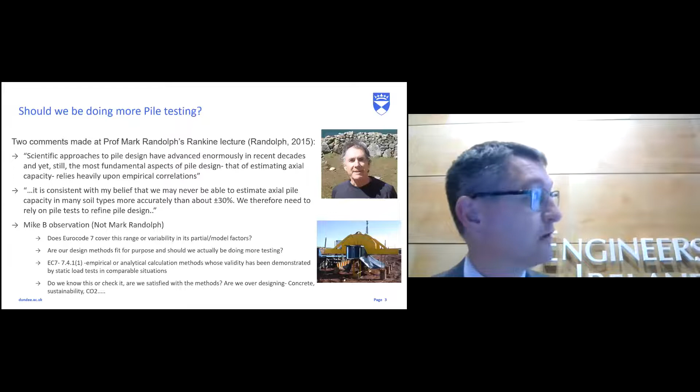So, pile testing - I picked out two comments from Mark Randolph's Rankine lecture on pile design, particularly offshore pile design, seen as a very important paper. It's quite interesting what he says about pile design being empirical and the use of testing. To paraphrase: scientific approaches to pile design have advanced enormously in recent decades, and yet the most fundamental aspect of pile design, estimating axial capacity, still relies heavily upon empirical correlations. He goes on to say it's consistent with his belief that we may never be able to estimate axial pile capacity in many soil types more accurately than plus or minus 30%. On that basis, we therefore need to rely more and more on pile testing and refine our design methods. So that's Mark, considered one of the gods of pile design, particularly offshore, telling us that we should be doing more pile testing.

And then my observations based on that - people are probably more familiar with using Eurocode than I am.

I'm an academic, I don't use these things. I hopefully put some bits in if we do good stuff.

Does Eurocode 7 cover this range of variability that Mark's talking about, plus or minus 30%? Are our design methods then fit for purpose? And should we actually be doing more to verify them? We always assume they've been verified, but do we actually know where our factors come from and what kind of tests or what kind of piles they were actually designed for? And it is there in EC7 already, that empirical or analytical calculations should be validated against static load tests in comparable situations. So are we confident that that's ever been done in their lifetime?

I think the other thing I have a problem with in this modern day, not using tests as we should, is that obviously with a view to things like sustainability, use of concrete, CO2 levels, if we're over designing, is that a result of our empirical methods? We should be refining things as much as possible to get away from that. So in my view, pile testing real piles and construction methodologies is important.

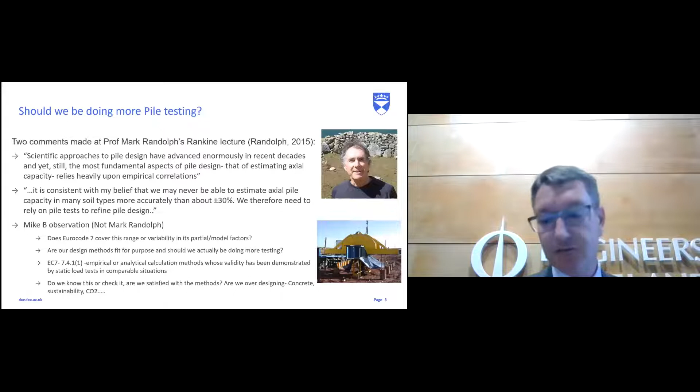What should be forcing us that way? Is there anything that we've got out there? So obviously this is UK experience. I'm not sure if you're familiar with the ICE's SPERW, but this is where we go in the UK for guidance on pile design, specification, testing, etc.

And they move more to a risk-based way of looking at pile design and pile testing. So if you've got low risk, for instance, you're well experienced on that site with that methodology in the same ground, then it's not essential that you're doing pile testing. But then if you're moving to higher risk situations where you've got complex ground conditions, you don't know how well your empirical methodology might perform there, then it starts to prescribe the amount of pile testing that you should be doing. So it is there in other forms of codification or local guidance, maybe similar in Ireland, but there is in the UK.

So there is a precedent for doing more pile testing based on risk levels for your site. Nothing in EC7, I think, at the moment, as far as I'm aware, to try and cover that.

Also, I think Trevor would have been at this, and I think we discussed things at the time of 2016 ETC3, Technical Committee European, on looking at EC7 and its effects to date in 2016 on how we design piles and how we construct them. And every country, apart from the UK, as I said there, they obviously didn't get the memo.

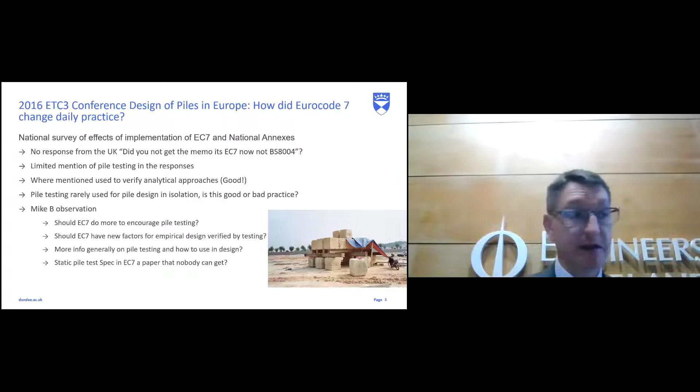So was there any pile testing going on? Are we using it as probably we should be? So as my observations again at the bottom there, should an evolution of EC7 been doing more to encourage pile testing? Should it have new factors or incentives or model factors if you do a pile test? Should it give you a better factor of safety effectively if you do the testing? And should there be more general guidance on pile testing?

I think I remember when looking at trying to get the spec for static pile testing, and it's an ISSMGE paper that nobody can get hold of, I think, from memory if you look in EC7, but maybe somebody's had more luck than me of getting that guidance.

So moving on to what I'm talking about that's slightly different, is my speciality, and what we generated testing standards for, or what we call rapid load pile testing. And this is different, obviously, from a static pile test, and it's very different from a dynamic pile test. And there's an example of the kind of outputs that you might see from this kind of testing. Here you can see time on the bottom.

Note, this is in milliseconds, and you've got a pulse of loading, and you've got the corresponding deflection as you go. So compared with a static load test that might take 3 days to complete, or a dynamic test that might be over in 10 milliseconds, you've got an event here that's about 100 to 200 milliseconds. So your pile's moving relatively fast, could be up to a meter per second in terms of deformation rates.

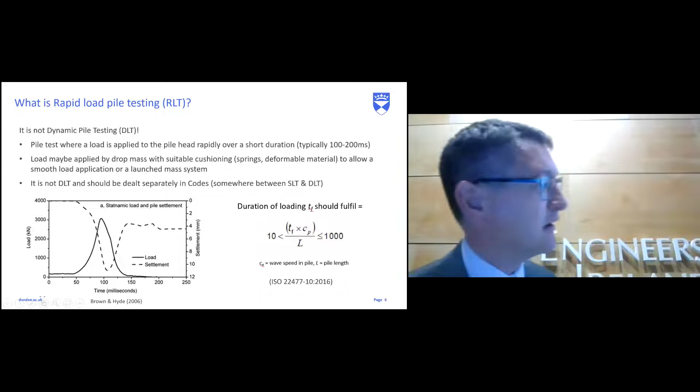It's undrained and viscous, moving very, very fast. One of the things I'd like to point out is that it's very different from dynamic testing, and obviously very different from static testing. There's an official definition in the code we developed for testing, which came out in 2016: ISO 22477 part 10, particularly for rapid load testing. So it's a very different test to a dynamic test.

Just to exemplify that, we've got my elephants to show you the differences. We've got a static test, an elephant sat on a pile. We've got rapid load testing in the middle, which is an elephant falling on a cushion - that gives you a longer test. And then we've got the dynamic testing over here. This was done by Allnamics, who produce a rapid load testing machine, and obviously they don't like dynamic testing because the pile's not very happy about being banged so hard so quickly. So slightly biased, but it shows you the slight differences in what we're doing.

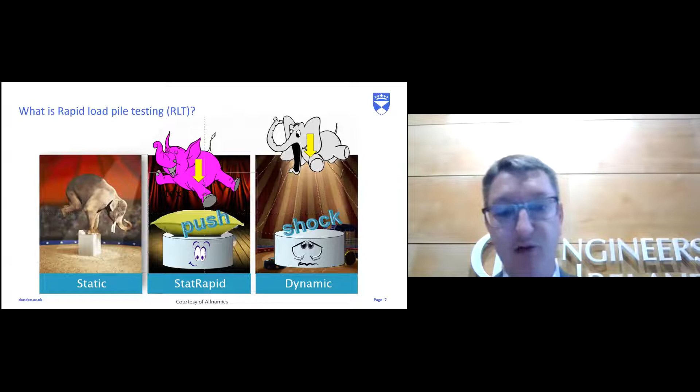So just to give you a feel for how it's built up, you see the machine on the left there - that's a 3 meganewton machine. You prepare the pile just by sticking or gluing a plate on the top, not a lot of work to be done there, so it's quite easy. You've then got a reaction mass that you saw being thrown up in the videos. It's about 5 to 10% of what you'd need in a static test, because you're accelerating that upwards at high speed, so you're getting the inertial benefit. The kit's a lot lighter than you would need for static testing.

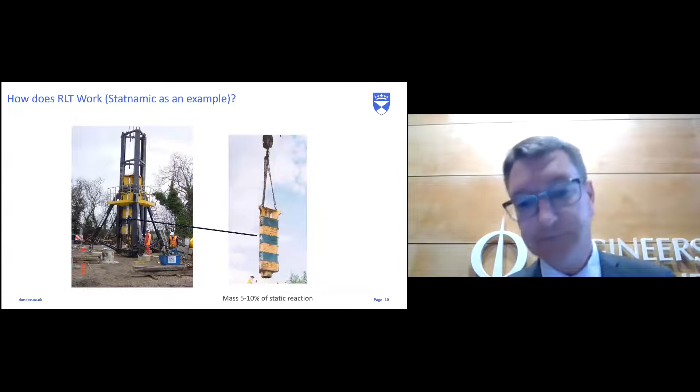Because it's quite an interesting event, we often use non-contact methodologies for measuring displacement. In this case, they are shining a laser on a detector that's on the bottom of the machine. More recently, they use high-speed optical methods - basically digital theodolites that track a target, as technology's moved on. We'll also put an accelerometer on the Statnamic machine at the bottom, which gives us backup of acceleration, velocity, and displacement as needed. So you can measure things in different ways.

The other thing to point out is that this sensor you'll see here is also a load cell. So you don't have strain gauges on the pile, you've got direct measurements of loads going on. Effectively, it's not like a dynamic test where you're having to interpret strain gauges on concrete, which may also be another source of error. So everything's measured directly.

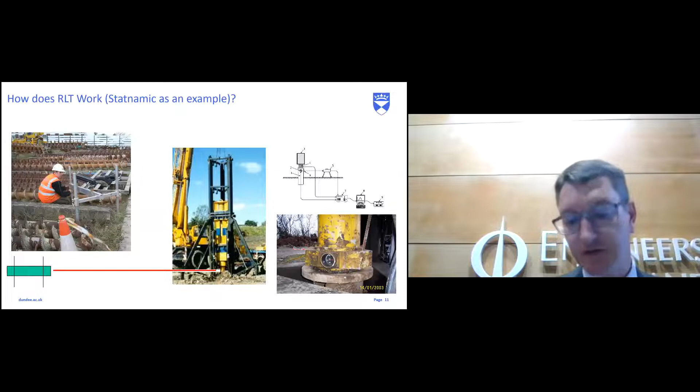And the Big Bang - how was that created? In the Statnamic machine, they burn a commercial fuel, as they called it - we're not allowed to call it explosives because people got jumpy when you went across borders with explosives. They're effectively mining explosives; they burn, you can burn them in your hand and they burn very slowly, but when they're constrained in the chamber that you saw there, they burn fast and create a lot of gas. It's basically a gas release that's forcing that mass upwards. So that's what they look like.

Some animation has popped in here - they pop that in this mesh cage. There's a shotgun cartridge cap in the bottom. They put 12 volts across that, and that starts the process, and they start their logging. You can see the guy on the far side loading it into the Statnamic machine, and there's a load cell at the bottom of that, which we saw previously.

There's a piston, and the weight drops down on top of that. When the gas is burnt, it vents out the top, and that's what forces the weight upwards, and you get an equal and opposite load on your pile head.

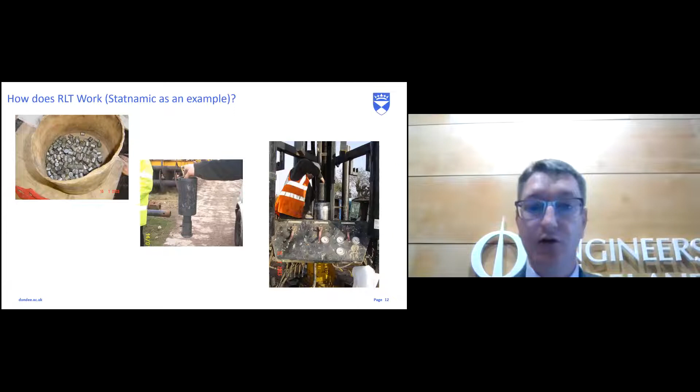Something's gone weird with the animation. In terms of different devices, effectively what you're doing is only creating a long duration load - that's all you're trying to achieve. So there are different ways to do this, and Statnamic has gone a bit by the wayside, I think because of the fuel problem - it's expensive, and getting it across borders and shipping it was a problem. So a lot of people have moved to more cushioning type systems.

So there's a couple of examples here from Japan. We've got basically a drop mass, as you can see, and they drop it onto a series of springs that have been tuned to control the duration of the loading event. You can see the differences in sizes here - something man portable at 200 kilonewtons, up to 2.5 meganewtons using a standard crane and some kind of rig to drop that onto a cushioning unit. So you can get quite a variation of different system types and approaches.

Pseudo-static pile load tester, again, that's a drop mass onto springs. Here the springs are above and below the weight on the left-hand side.

And then the dynamic guys tried to get in the action a bit. This is just a drop weight, and they dropped it onto what I call the egg box. The egg box is just a deformable piece of steel coated in rubber, so when the mass drops on it, it traps air in the little egg box pockets, and that again acts as a cushion and deforms to try and create a longer load duration.

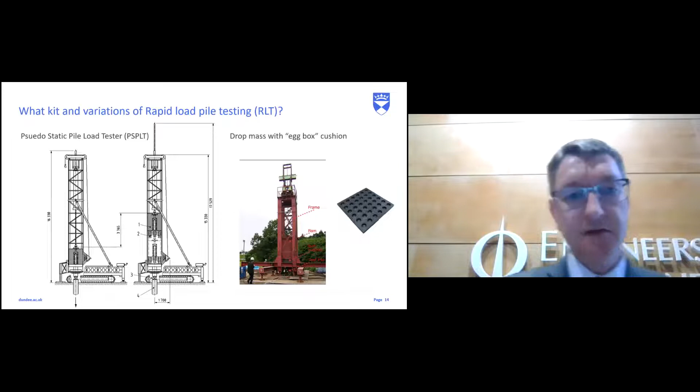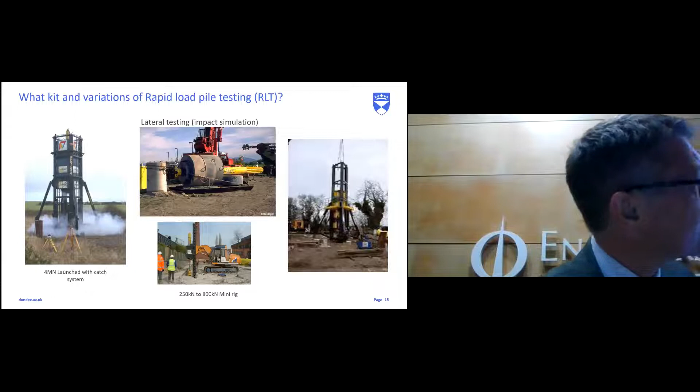Statnamic, we've just seen - this was the most common thing when I was doing my PhD, different rigs, 4 meganewton, used for lateral impact load simulations. They've used it before, so it isn't just sat on its side - it's about to load that pile as if it was a ship type impact. You can see a range of different rigs there, right down to something that can go on a mini crawler and give you about 250 kilonewtons. I think the biggest Statnamic test ever done is 103 meganewtons. So there's quite a scope of sizes, different types of tests you can do, and benefits to doing that.

That's the same pile, just cycling, just reloading each time. You can quickly - not static testing, but you can do different cycles at different pulse levels. We might see that in some of the data in a bit.

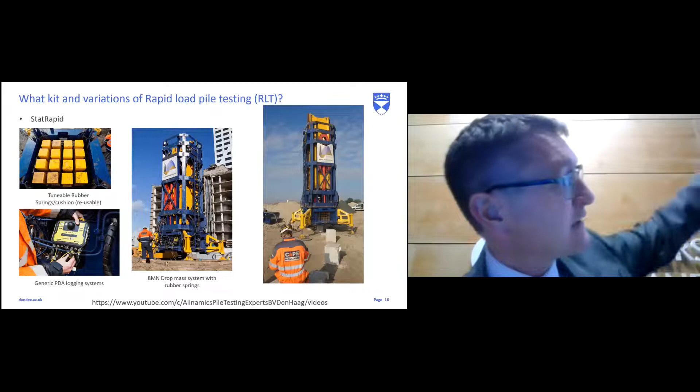That was a bit more impressive, wasn't it? I think the most modern evolution of this is the rigs that Allnamics are using, based out of the Netherlands. Again, this just works on a drop mass system - we'll be able to see the video - and they use a series of recyclable rubber springs. These are just rectangular, long cuboid type springs. They load them in, and they've got different colored ones that give different durations of events. Again, they can control the height of the drop to control the magnitude of the event. These guys supply all sorts of offshore monitoring as well, using standard PDA type systems that they supply themselves.

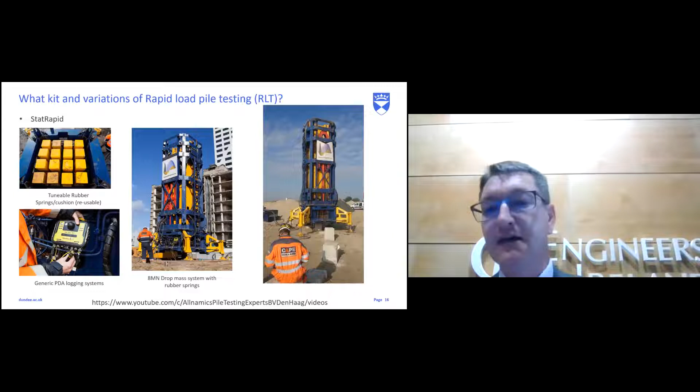So it's far less interesting because there's no fuel involved. They just use hydraulics to pump it up to the height they need, then drop it, and it catches as it goes, so it doesn't reload the pile. That's one of the problems with some of the early systems people came up with - you get a weight bouncing on the pile, and then it's difficult to sort out what your load signal is, what your final displacement is, this kind of thing.

I think it's also quite nice that it shows off what you can do on a congested site on working piles. There are 3 or 4 piles next to each other, with very small compact rigs that you can get onto small sites and test as you go.

So I think that's why I've used this example, the photo here of this congested site with lots of small piles where they're testing working piles, getting access to that, which is not something you might normally think about doing with a standard Kentledge or reaction pile static load testing regime. So there's much more scope for testing working piles with some of these systems.

So that's my long list of benefits, obviously biased because I did my PhD on it, so quite happy to be pulled up later on it.

Congested sites, we said, it's obviously fast, quick setup. How long are you talking for a normal static pile? With reaction piles, maybe 6-7 days if you've got to get your piles in before you're doing anything. And then you could be up to 3 days, depending whether you're doing MLT or CRP type testing. Multiple cycles on a pile, as I've said.

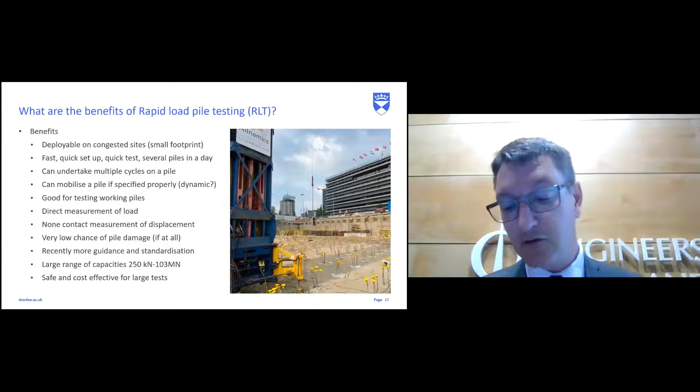So going a bit more towards drawbacks, being brutally honest, quite happy about that. That was what my PhD was on. When I started, a lot less experience and guidance, and that's something I've been trying to do a little bit about myself as an academic.

Availability of equipment. Currently, I think you've got to go to mainland Europe, Holland, to get the nearest machines. So you're going to have to mobilize something that's going to cost you money. So you're going to have a relatively big job to probably get it onto Ireland, I think, to make it cost effective.

Both dynamic and rapid load testing don't give you characteristic resistance directly. There's always going to be some analysis, not currently mentioned in EC7. Hopefully with the evolution they are, and the testing standards that we've created that are supposed to integrate with that. There are no model or partial factors in EC7. So how do you do design on that at the moment?

And my area of interest is in clays, you're going to get big rate effects. So you're not pushing something at 0.01 mil per second, you're pushing something at a meter per second. And how do you deal with that in terms of rate effects?

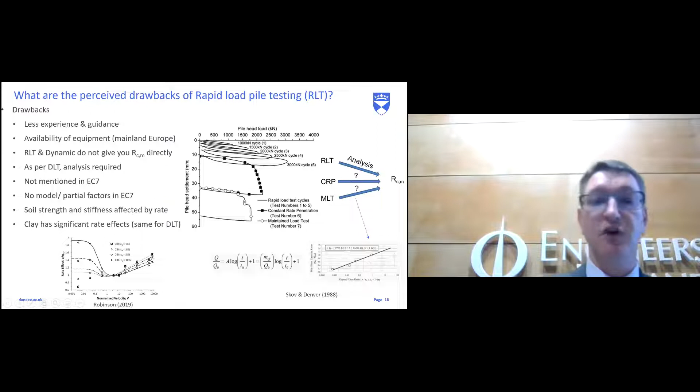So what is the right speed to test at? Probably there shouldn't be a standard speed. It should probably be soil dependent, but you can get much greater gains in pile capacity by going very slow. We work down here undrained, but all my work is out here in the viscous regime, where the soil is moving very, very fast. So thinking about rate effects is an interesting thing anyway - partial drainage, undrained, viscous - something useful to be aware of, I think.

Being engineers and specifying things, we need precedent. We need to be confident in our methodologies, and rapid load testing is relatively new. Before I started, there were two international conference proceedings on it, symposiums in Europe, and the regular stress wave conference - I think the next one's in Rotterdam soon.

It's mentioned there quite a lot. There are European case study usages - I'm responsible for one in Grimsby, which is the same soil as Cowden Till. If you've heard about the Pisa testing, that's where they were testing the Pisa piles for monopiles. It's been used for a long time by BRE, and Oxford ended up there doing their Pisa monopile testing, so quite a bit of work there previously done by BRE, and then reported by myself and John Powell of cone fame.

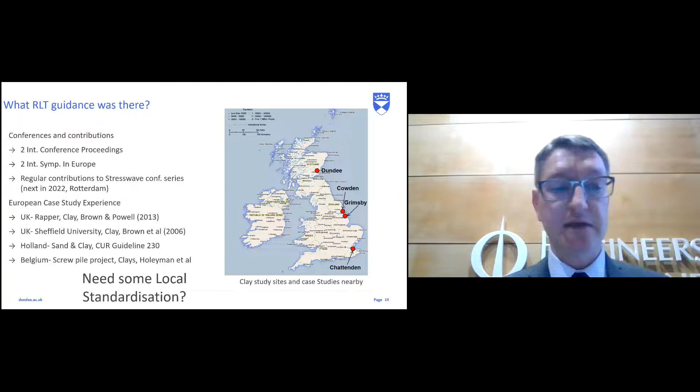In Holland it's been used a lot, so there's a lot of documented studies, similar in the US. The CUR document there is like a BRE standard in Holland, and they've built up similar databases for Holland, Germany, and the US. So there's a lot more experience in Europe of these testing methodologies - those are just some of the relevant documents.

And then, sort of where I came in, I got roped into being on a working group for TC341, where we got given the job of creating testing standards for dynamic load testing and rapid load testing. One of the problems we had, and if we're criticized for it, is that we had to develop those while there was no static standard. The static standard actually came out after the rapid standards, because it started around 2000, before my PhD, and they still couldn't agree in Europe and come up with a standard. I think that project got cancelled about three times before they finally came up with one.

Trevor will be able to tell us whether it's in EC7 with its evolution, because it's not currently mentioned, as I said, in the one we've got at the moment. And there are no model factors, which is a problem for rapid load testing.

Why was I brought in? I think I've got a track record, even as an academic, of making things happen. There are several big publications with my name behind them, and I got brought in as the Yorkshire Terrier to try and bring it out. I'm from Yorkshire, if you didn't know, and unfortunately our national dog is not as interesting as the Irish Wolfhound - I've got the Yorkshire Terrier, unfortunately. So when things seem to go wrong, I get brought in to make them work. There were a lot of arguments, and the working group had stalled.

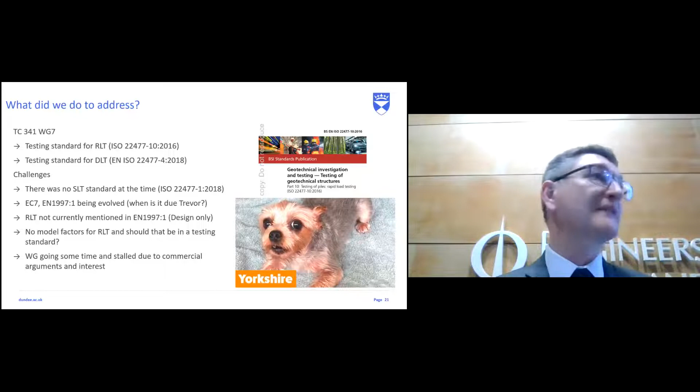What I'll mention later is, as an academic, you see there's a lot of commercial interest. So maybe not in a Eurocode, but in a testing standard, everybody has a competing technology. I was just battling all the time for things to go forward, but it was for commercial reasons, not technical reasons, that I was being held up.

So what's in the standards and what's not in the standards, and what needs to be in the testing standards. I'm talking particularly about the testing standards for the two types of pile testing we're looking at.

When we looked back in the literature, David Muir-Wood showed that the surface area of the particles in clays affects their behavior quite significantly. He found a link with slope of the critical state line and plasticity index. There's something more fundamental going on.

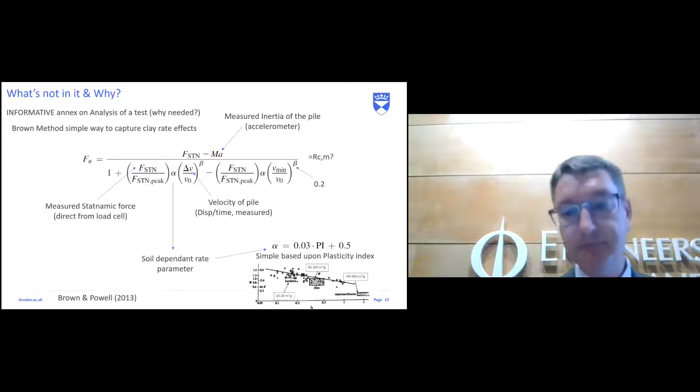That actually comes out as something that Randolph and Simons created for dynamic pile testing, so it's got history as well. But me being simple, I just linked it with plasticity index. There's no point for me having loads of equations that nobody can find the parameters for, and you can't measure from a simple lab test. So all of my work correlates back to plasticity index, even though we used some very specialized machines to measure the rate effects as we went.

So that's always my aim, to make it nice and simple, or nobody will ever use it.

This was all going into an informative annex, was my aim. I never really got there, so it isn't in the informative annex.

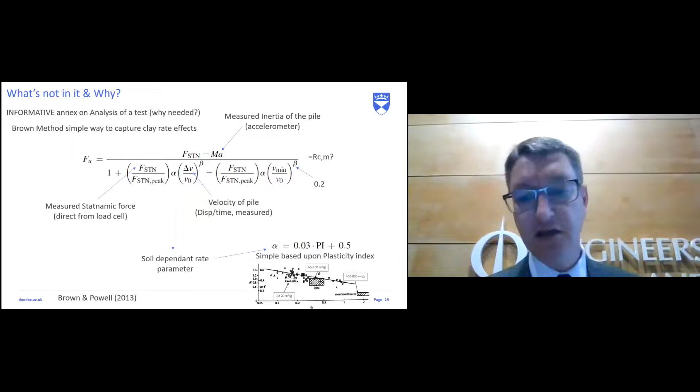So in our standard we've got a testing methodology, and at the end of it, because we needed some way of coming up with these rate effects, we thought we needed to have some design methods in it.

So we've got an informative annex, and we need an analysis methodology in there. My method's not in there. I get accused, or have been accused, of being an academic who likes to shout about what he wants to do—just blow your trumpet and get it in the standards. I was in charge of the standard, and my method's not in there. It is mentioned as something you might be able to use, but I'm also overly critical of everything I want to do and be perfect. It was only for one soil type.

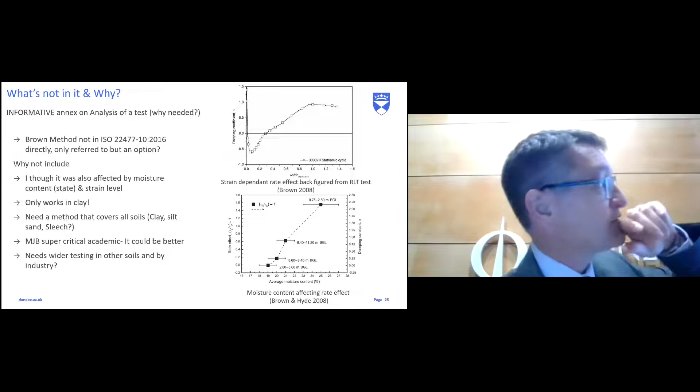I thought there was a lot more going on. I think at the time it was a function of state and strain level. So we back-analyzed rapid load tests, shown top right, for moisture content. You're seeing an increase in rate effect with moisture content, and very different strain level behavior during the test. Also, we've got lots of different materials we're going to be testing.

So I wanted a method that would work in sand, clay, silt, whatever else. All my original work was in clay, so it's mentioned but not fully addressed. I thought there was more work to do - typical academic - and there was more work to do, and we did it.

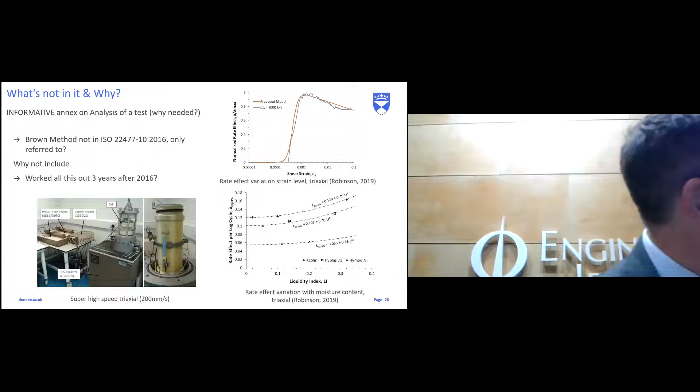So we built a very high speed triaxial rig. This can go about 200 millimeters per second. My original guesstimate of what was going on was actually correct - we've got very different strain dependent behavior with rate effects. They only kick in at a certain point, they maximize, and then they die away a bit.

They're also very much moisture content or state dependent, so you see very different rate effects for different soils. None of this '10% per log cycle' you get told - it's a load of rubbish. It also varies with moisture content, and isn't affected too much by over-consolidation ratio or stress history. It seems to be affected more by state.

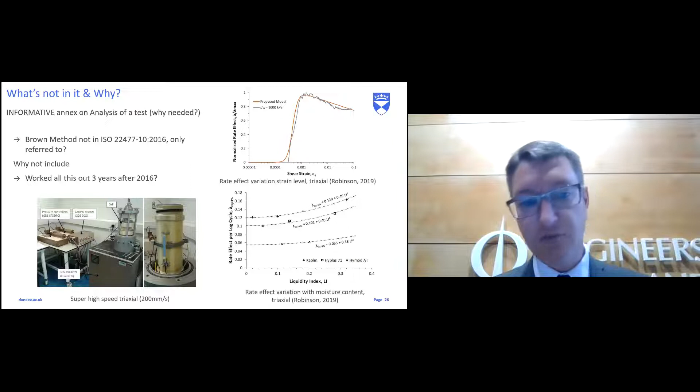Some of my early reasons for not putting it in were actually true, and we didn't work this out till after 2016 - so in some ways I'm happy mine didn't go in. What we did end up with was an informative annex telling you what to do, based on a methodology from industry, a large database of different tests, and distilled down to a very simplistic methodology anybody could use, because I like simple methods.

All this does is take off the inertia, using something called the unloading point method. Basically it looks at the point where you've got zero velocity in the test, and assumes that's similar to your static resistance minus inertia, because it's not moving.

It worked all right, but it needed correction. So based on a database of a lot of tests, we came up with a corrected method. This is one of the tables in here for picking the correction for different soils.

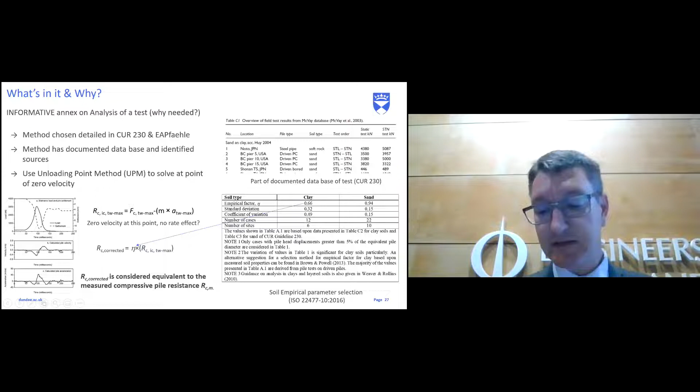We also thought it important that anybody - and his Yorkshire Terrier or his dog - could work out how to use the methods. So once you've got the data, the back of the document tells you step by step how to use it, and even how to create all the graphs.

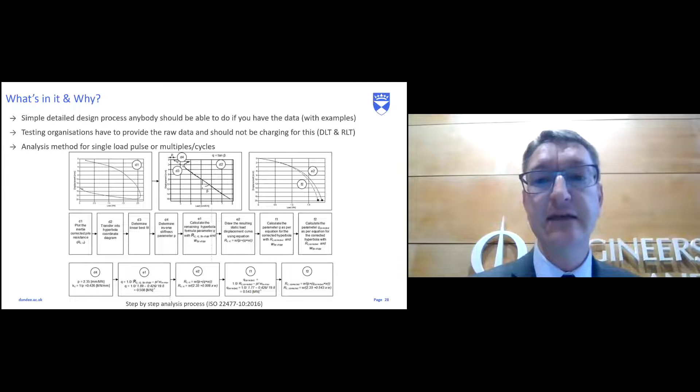So anybody could get the raw data from their pile testing person. If the dynamic load testing people tell you you've got to pay for it, just wave our testing standard in front of them - we got rid of that clause, so they have to provide their data for free. Some dynamic testing people try to charge for the real raw data - no, you have a right to it, so don't let them charge you.

But once you've got it, you can feed it into this testing standard, and anybody should be able to get the same answer. It's not so specialized anymore.

So just coming to finish, hopefully close, last few slides - how then do I feel EC7 should evolve based on what we've been doing in pile testing, and more generally, everything that's come out of this presentation.

There's the issue of a lack of testing going on. Can't speak for how the Irish do things, but throughout Europe I think there should be more testing happening, particularly when we're trying to be more efficient in our designs, reduce CO2 and concrete use, and particularly trying to get away from conservatism.

So I think when codes evolve, they need awareness of our testing standards. We've put a lot of work into making three standards to do with piles. Hopefully they feed through and don't get ignored, because they were designed to feed into that document. So you've got a design standard, an evolved Eurocode 7, and then you've got these testing standards where you go to find out about particular different tests.

Personally, I don't treat them as the same thing. There are commercial reasons behind that I won't go into, but they are very, very different tests, as you'll be aware from our elephants and also for people that have witnessed pile testing, and their analysis is very different. Rapid load testing is not dynamic load testing. It's a very different thing. It's not stress wave based, which is where all of that comes from.

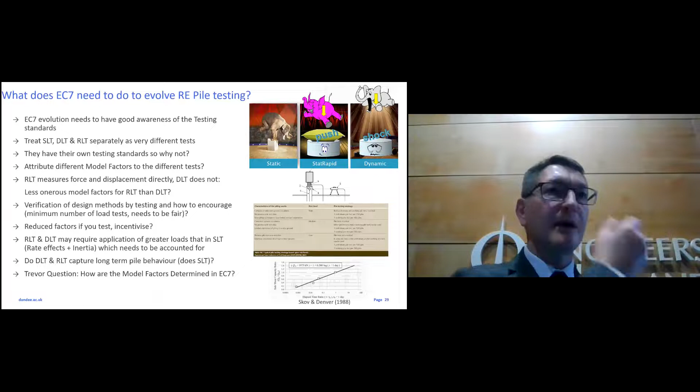So should you be giving less onerous factors for different methodologies? I think we should be doing more pile testing, as I said, and hopefully in an evolved EC7 it's encouraging that. It depends on risk. Do you know the site? Have you used the piling methodology before? I think pile testing is obvious to me: you do a design on a bit of paper and you come up with a pile resistance methodology, but there's often nothing in there on how we got there or what kind of method we used.

It's often based on some wished-in-place methodology. How does it correlate to real pile testing and real construction? And how then do you pick up when things go wrong? If you don't test piles, how do you know something hasn't gone wrong in the construction process? So I think there needs to be much more on what I call installation effects in our design methodologies as well, not just wished-in-place type design that we seem to default to quite a lot.

So that's back to reduced factors, particularly if incentivizing testing. One thing I would be wary of: if you specify rapid load tests and dynamic load tests, because of these rate effects and mobilizing the piles, you need to put a lot more load on, particularly for rapid load testing. You could see there we were putting nearly 1.5 times the load just to mobilize things. The rate effect is there, it isn't going away. If you come along and specify these tests as if you're going to apply a static load test, it isn't going to do anything. It is a different beast and you need to think about what you're doing.

But I think that relates to getting contractors involved at an early stage. They know more about these methods than I do because they do it day in, day out. Why not get them involved and get the proper advice?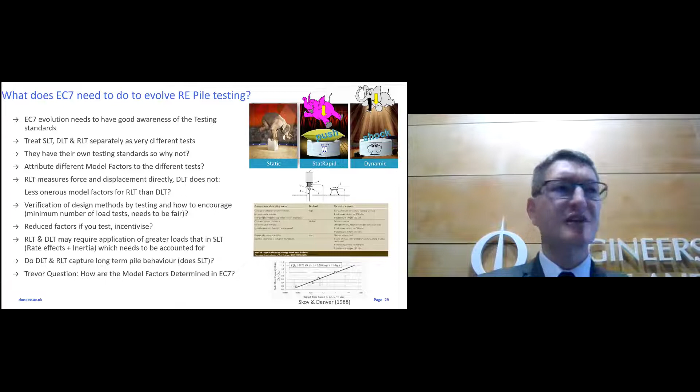Everybody can argue DLT and rapid load testing capture long-term behavior. I would argue, do static load tests capture long-term behavior as well? We see a lot of these things that came out of Imperial about evolved pile capacity over long periods of time. So there's always an argument about whether it's a static pile test, and I always ask, well, what is a static pile test and what is long-term pile behavior? So maybe don't get your knickers in a twist about it, and just accept any test is a good test. It's all helpful as far as I'm concerned.

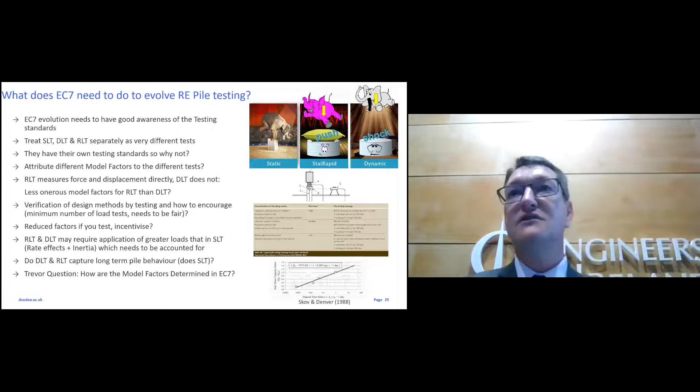So I'm not involved with any of these organizations or methodologies anymore. More testing is better, horses for courses. If you've got a dynamic machine on site or a drop hammer on site, you're going to use DLT. It's obvious, you don't have to mobilize something, it's there, use it.

Any testing is good testing as far as I'm concerned. And then leveling one at Trevor, you might not want to answer: how are our model factors determined in EC7? It reminded me, as an undergrad, I'm sure it was a Guinness beer mat, but it might have been a John Smith's, so sorry if I'm saying the wrong beer, but I was looking for beer mats and couldn't find it. It said 87.6% of all statistics are made up on the spot. So do our model factors come from statistics?

And if they do, are they made up? I think they're confidence, but we can push Trevor on it when he's had a few beers.

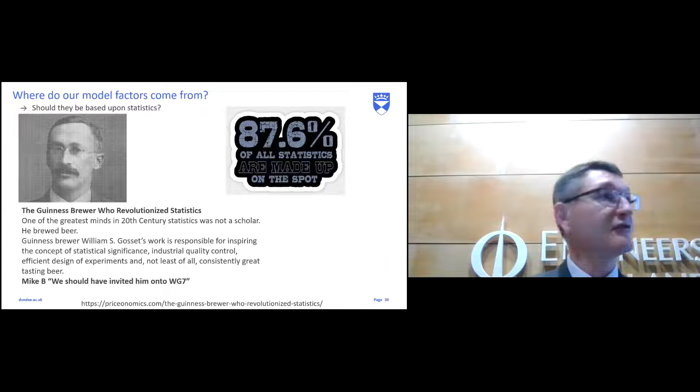I just found out of interest, you might have come across William S. Gosset, supposedly one of the fathers of modern day statistics, who came out of the Guinness Brewery. He was trying to refine the actual process using statistics, so I think it's quite funny. He's a bit like a code type working group member. It says he developed the concept of statistical significance, industrial quality control, which is what we're sort of doing, efficient design of experiments, and not least of all, consistently great tasting beer. I wish he'd been on my working group just for that last reason.

Thank you very much, Mike.

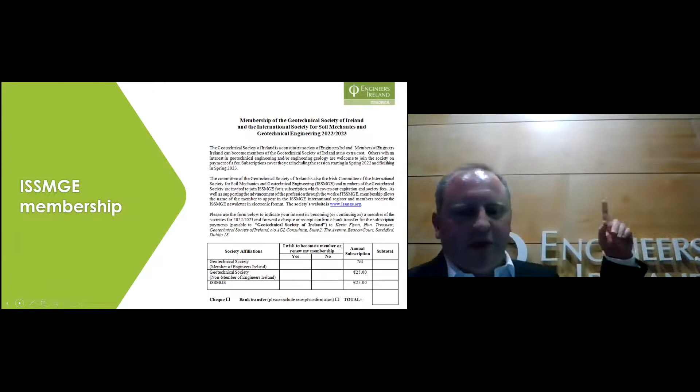Basically, there are two ways of joining the society: one is just go to the Engineers Ireland webpage and say you're interested, or you can fill out this form. Now, this form is useful because we do have members who aren't engineers, particularly geologists, who are encouraged to join us. So we do have membership outside Engineers Ireland, and this form is a useful way for them to join.

And if you were interested in joining the ISSMGE as well, you can get this form. Kevin Flynn is the person to contact. I had his email up shortly: kevin.flynn@agl.ie.

What do we do as part of ISSMGE? Well, one of the things we do is sponsor young geotechnical engineers to attend one of two conferences, either the European Young Geotechnical Engineers Conference or the International Young Geotechnical Engineers Conference. I think Trevor's probably going to discuss this a bit more later.

He's nodding, I think I'm right. He held a European conference here back in the mid to late 80s, and the money that raised has ever since provided the sponsorship for sending young engineers to one of these two conferences. Now, young is defined as under 35, which for a long time I felt was very generous, but no more.

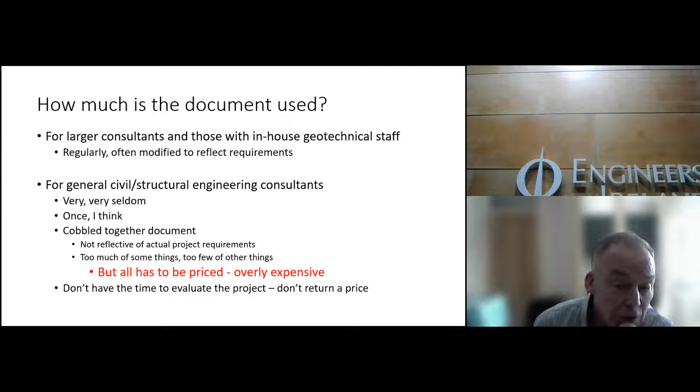And it makes the job expensive. Some consultants have said they don't have time to go through it to change the specification to reflect what they think the job should require. So, as Carl said, one possible solution is for us to do a slimmed-down document.

Talking with the contractors, they reckon our document is too big and actually scary. It's 175 pages, and a lot of civil engineers don't have the time or the training to understand everything in it. What they're looking for is a slimmed-down document, maybe 10 to 20 pages long, that they can go through and actually use. So this is something we're considering, along with updating our specification.

We were talking about what we might do, what way a simple document should be, and what it might be used for. One of the things we thought was maybe we could use the GC1, GC2, GC3 categories. And again, just like Mike, if Trevor needs to slap my wrist, he can do that later, but it'll be virtual because I won't be there. So maybe GC1 is something that civil engineers can price, because that's the majority of the jobs done in Ireland, and that might be what our slimmed-down document reflects.

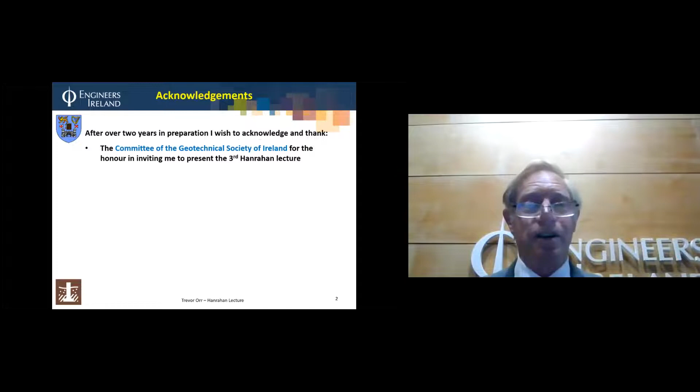As you're aware, this lecture should have taken place two years ago. I wish to acknowledge and thank the committee of the Geotechnical Society for the honour of inviting me to present this 3rd Hanrahan Lecture: Ciaran Reilly, the previous chair, who issued the original invitation, and Carl Brangan, who organised so many reschedulings - this is the 5th date we've had for today's event. Also Ken Murphy, here present from NSAI, and Eric Farrell and Ciaran Reilly for comments on drafts of this presentation and providing me with information and photographs which I've used.

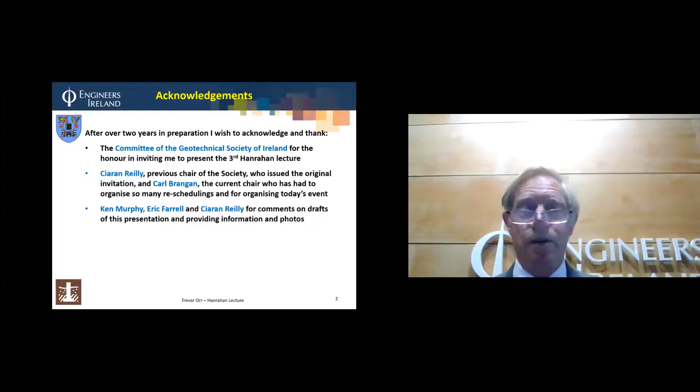Many geotechnical friends and colleagues in Ireland and Europe have shared their knowledge of geotechnics and their friendship. And I better not forget my wife Diane and family for their support and patience, putting up with me working on my presentation, often late into the evening or night, and not being available to look after grandchildren when I think Diane thinks I should have been.

The topic I've chosen is how geotechnical design in Ireland and the rest of Europe has advanced with Eurocode 7. So here is my plan for the lecture.

First, looking at the situation prior to Eurocode 7, then the start of Eurocode 7, then some challenges in drafting it, then Eurocode 7 and how it relates to the various standards bodies, the regulatory background and Irish standards, a spread foundation design example, then the 2nd generation of Eurocode 7, and finishing up with some conclusions.

Now, the situation prior to Eurocode 7. When work started on Eurocode 7 in 1981, there were no Irish standards for geotechnical design. Ireland didn't have a dedicated national standards body. Responsibility for standards functions in construction was shared by a number of organisations.

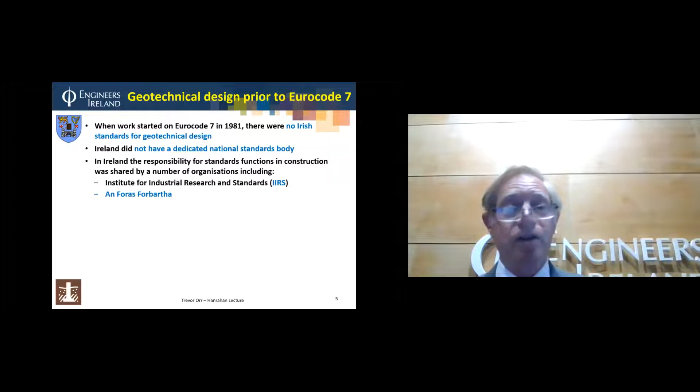These included the Institute for Industrial Research and Standards, IIRS, and Foras Forbartha, and a few others as well. Geotechnical design in Ireland was generally carried out in accordance with British codes of practice or standards, with separate codes for different geotechnical structures. For example, CP2, Code of Practice for Earth Retaining Structures, issued by the Institution of Structural Engineers, published in 1951, and CP 2004, Code of Practice for Foundations, published by the British Standards Institution in 1972. In Europe, most countries had their own different standards for geotechnical design, reflecting national practice and ground conditions. So that was the situation prior to Eurocode 7.

Now, if we look at CP 2004, it provided much advice on the design and construction of spread and pile foundations and caissons. That's a photo of the cover of the volume, the green volume, Code of Practice for Foundations. This and other codes of practice provided no requirements, only recommendations, since the operative verb used was 'should', not 'shall'.

It was based on allowable bearing pressures with global factors of safety. There was very little guidance provided on the safety level required, and no advice on the selection of ground parameter values. It stated for cohesive soils it's always necessary to ensure the foundation is safe against shear failure by taking a presumed bearing value not greater than the ultimate bearing capacity divided by a suitable factor of safety, conventionally of the order of 2 or 3.

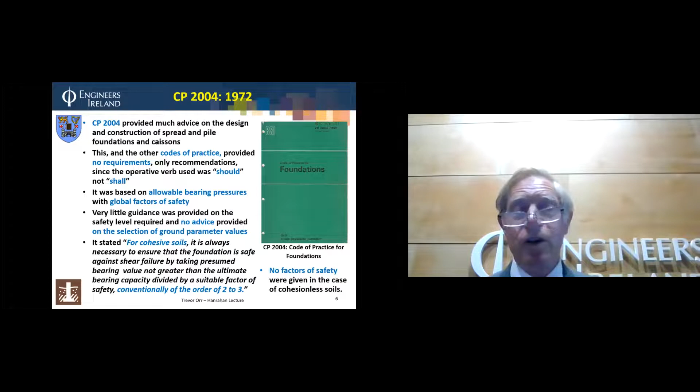And with regard to non-cohesive soils, no factors of safety were given in the case of cohesionless soils. So there's not a great deal of guidance there on the level of safety.

Now, Irish guidance design documents. For guidance on the properties of Irish till soils, as Carl has mentioned, many engineers use Professor Hanrahan's booklet, Irish Glacial Till, Origin and Characteristics, published by Foras Forbartha in 1979. Obviously it's still being used, according to Carl, and it was certainly used back then.

And that's a copy of it. It's looking a bit worn at this stage. That's the cover of the booklet, and that's the inside title page. You can see there, at the bottom, Professor Hanrahan's name, E.T. Hanrahan, as the editor or author of it.

Now, bylaws. The only regulations relating to geotechnical works in Ireland prior to 1981 were the bylaws of the corporations of Dublin, Cork, and Dún Laoghaire. That's a copy of the bylaws of Dublin, published in 1949, still being used in 1981. And those are the bylaws for Dún Laoghaire, published in 1959.

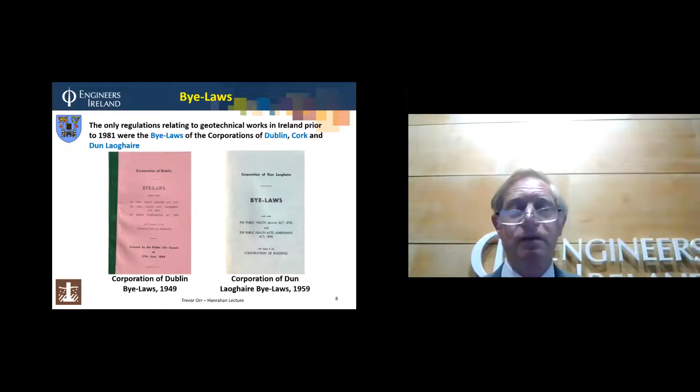The bylaws' requirements for foundations were almost identical in both texts. The only difference was that the Dublin bylaws referred to different people compared to the Dún Laoghaire bylaws, which I'll come to. Regarding foundations, both bylaws stated in clause 12 that every foundation shall rest on suitable ground and shall be constructed to sustain and transmit safely all loading imposed thereon. However, there was no definition of what suitable ground was or what transmitting safely all the loading imposed meant.

Verification of this requirement was through inspection from the local authority. Clause 109 in both documents stated that every person who shall proceed to execute any work to which the bylaws apply shall, before proceeding to fill any foundation, give the city architect or building surveyor, in the case of Dublin, or the borough surveyor, in the case of Dún Laoghaire, at least 2 clear days' notice in writing. I'm sure today, 2 days' notice wouldn't be sufficient.

Now, let's look at the IEI and the ISSMFE. Up to 1977, there was no professional organization specifically for geotechnical engineers in Ireland. This relates back to what Carl was mentioning at the start of his talk on the GSI. So in 1977, Matt O'Donovan, who was the Secretary of the Institution of Engineers of Ireland at that time, noted that contrary to the general trend throughout the world, the membership of the Irish National Society of the International Society was falling, the ISSMFE.

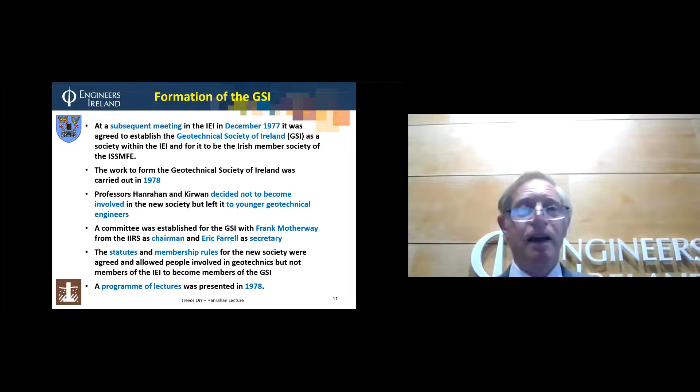Political situation now prior to Eurocode 7. Politically, in 1981, Europe was divided into 2 zones, East and West, with the Iron Curtain and very little communication and great restrictions on travel between the 2 zones.

In the West, in 1973, Ireland, the UK and Denmark joined Belgium, France, West Germany, Italy, Luxembourg, and the Netherlands to become members of the European Economic Community, EEC, also known as the Common Market, which is the precursor to the European Union. Greece then joined the EEC in 1981.

Up to 1979, there was a one-to-one link between the Irish pound and the pound sterling. This link with sterling was broken in 1979 when Ireland joined the European Monetary System, the EMS, but the UK did not.

Now let's look at the start of Eurocode 7. In 1974, a number of European universities and representatives of the engineering profession decided to prepare harmonized European standards for structural design based on the limit state design method.

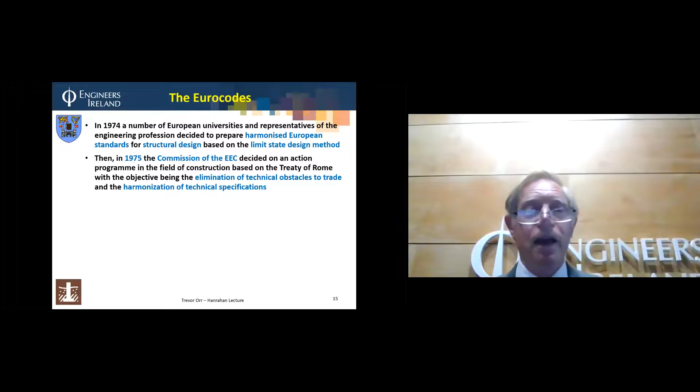Then in 1975, the Commission decided on an action program in the field of construction based on the Treaty of Rome, with the objective being the elimination of technical obstacles to trade and the harmonization of technical specifications. Within this action program, the Commission established the Eurocodes, a set of harmonized technical rules for the design of construction works, which would initially serve as an alternative to the national rules and ultimately would replace them.

The European Commission decided to link up with and support the work that had already begun on the preparation of harmonized European standards, so that from the start, the Eurocodes were based on the limit state design method.

Now, the plan for Eurocode 7 and the Irish connection to it. In 1980, the Committee of the European Commission responsible for the Eurocodes was planning to draft Eurocode 7 for geotechnical design, but unlike for the other codes, there was no model limit state code to start from.

Professor Kevin Nash, Secretary General of the ISSMFE and Professor at King's College London, and also a graduate of Trinity College with Irish roots, wrote to the Eurocode Committee saying that the ISSMFE was keenly interested in drafting a model code for Eurocode 7 and reviewing geotechnical design practice in Europe.

He stated the ISSMFE considered it important that Eurocode 7 is established as a flexible code in order to take the large differences in the physical environments within the area of the community into account, and also to allow for future scientific development of foundation engineering in Europe.

I think this relates back to what Mike Brown said in his lecture earlier about the code needing to be flexible. Hopefully that has been achieved in what has been published, and certainly allowing for future scientific developments is important. So in writing this statement, he was correctly anticipating some of the challenges that would arise in the development of Eurocode 7 and its eventual form.

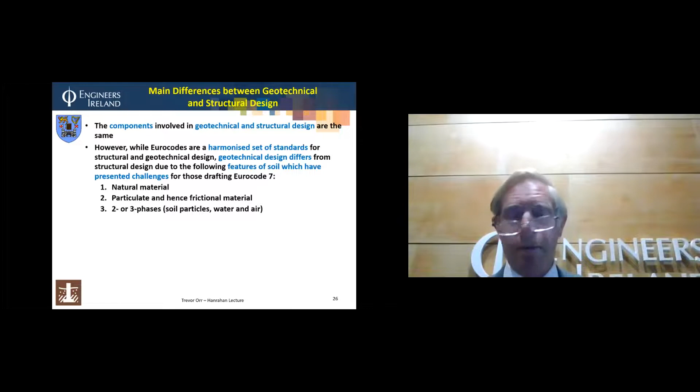First of all, it's a natural material — all the others are manufactured, manufactured to specification. Soil is natural, it's particulate, meaning it's a frictional material. It's 2 or 3 phases: soil particles, water, and air. It has a wide range of particle sizes, leading to time-dependent behavior. It's inherently variable, and also spatially variable. It's ductile, it's dilatant, it's compressible with low shear stiffness, and has nonlinear and complex stress-strain behavior. So those are the features that presented challenges.

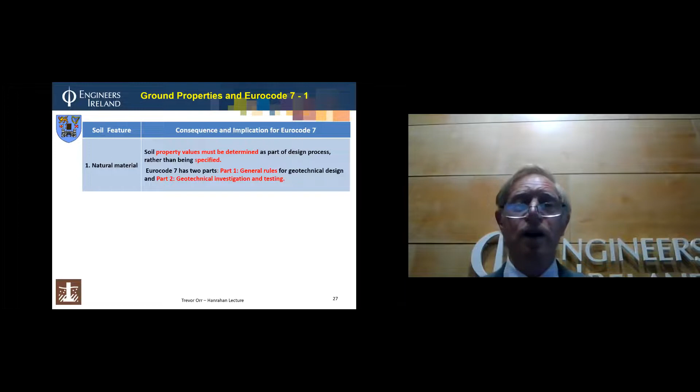So let's look at them individually — soil features and the consequences and implications for Eurocode 7. Being a natural material, soil property values must be determined as part of the design process, rather than being specified as for manufactured materials. Therefore, Eurocode 7 has two parts: Part 1, general rules for geotechnical design, and Part 2, geotechnical investigation and testing requirements.

Since it's particulate, it has frictional behavior, so strength depends on normal stress. Therefore, you need care factoring loads, as they're unfavorable when acting as loads, but favorable when contributing to the resistance. So you need to be very careful how you factor them.

Being a 2 or 3 phase material, soil behavior is a function of effective stress, since the mineral particles have shear strength while water and air have no shear strength. Therefore, the principle of effective stress needs to be taken into account. Two additional limit states relating to hydrostatic and seepage groundwater pressures were also required for Eurocode 7.

Then the wide range of particle sizes causes a wide range of permeability, so dissipation of pore pressure may take a long or short time, hence the need to consider both undrained and drained conditions.

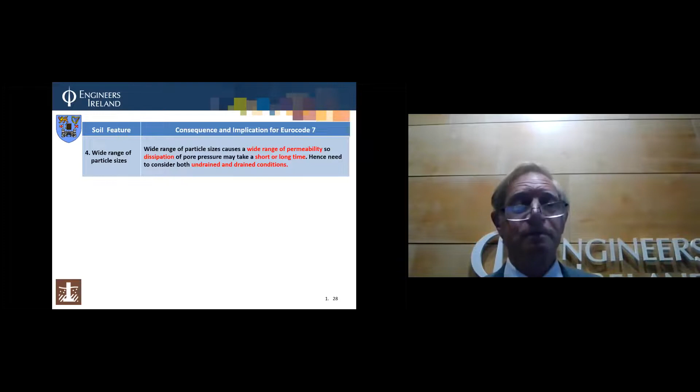It's inherently variable, and the inherent variability of soil properties is usually much greater than the variability of permanent loads. Hence, the partial factors on loads in Eurocode 7 are usually much smaller than those in structural design. For example, the partial factors on permanent and variable actions in Eurocode 7, taking design approach 1, combination 2, are 1 and 1.3, compared to 1.35 and 1.5 for structural design. And larger partial factors are generally chosen for ground properties — for example, 1.25 on tan-phi compared to 1.15 on steel strength.

And then spatial variability: since soil varies spatially and the volume of soil involved in any design situation is much larger than the volume of soil tested, it's not normally appropriate to select the 5% fractile of test results as the characteristic value. Therefore, a special definition was required for the characteristic value of a soil property.

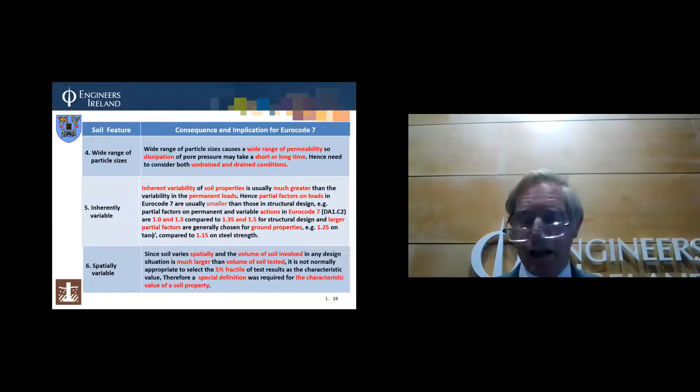The definition given in Eurocode 7 is that the characteristic value of a geotechnical parameter should be selected as a cautious estimate of the value affecting the occurrence of the limit state. Each of those words is important. It's a value that has to be selected, so you have to make a considered choice when selecting it. It's a cautious value, it's an estimate, and it's the value affecting the occurrence of the limit state. Those four words are all important when you come to select the characteristic value.

Geotechnical engineers have a definition for the value of the soil parameter to be chosen for use in geotechnical designs and have a value to aim for. This was an important and innovative development because prior to this definition in Eurocode 7, the value of a geotechnical parameter for use in design calculations had not been defined. Engineers had to use their judgment and experience with no guidance. Often geotechnical parameters used were the values provided by ground investigation without any consideration of the design situation or the relevant limit state.

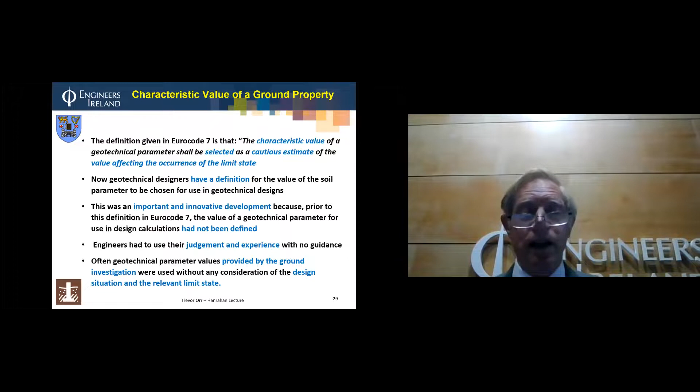Now go back to the ground properties again. The seventh one was ductility. Soil can undergo very large deformation before failure and still retain significant shear strength. This ductile nature is beneficial because when soil supports a redundant structure, areas that are more heavily loaded or weaker areas of soil will yield, allowing load to be transferred away from those areas to the less heavily loaded or stronger areas. This allows partial factors on loads in Eurocode 7 to be less than in structural design.

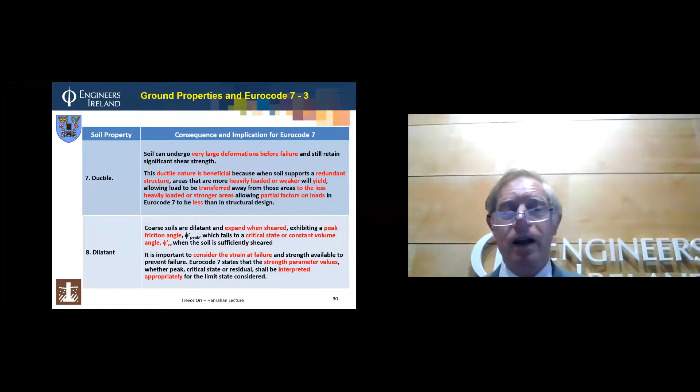Dilatancy: coarse soils dilate and expand when sheared, exhibiting a peak friction angle phi peak, which falls to a critical state or constant volume angle when the soil is sufficiently sheared. It's important to consider the strain at failure and strength available to prevent failure. Eurocode 7 states that the strength parameter values, whether peak, critical state, or residual, shall be interpreted appropriately for the limit state considered. So you need to consider which are the appropriate values for your limit state.

Then compressibility: soil is normally much more compressible and less stiff than structural materials, and it can undergo large deformations exceeding the limiting values. So the controlling criterion is often limiting the deformations rather than preventing failure. Geotechnical designs are therefore often controlled by serviceability considerations rather than ultimate limit state requirements.

Number ten, nonlinear and complex stress-strain behavior. It's often difficult to determine appropriate parameters and to model soil deformations, so it can be difficult to predict deformations reliably. For some geotechnical design situations, ultimate limit state calculations may be carried out with appropriate partial factors to limit the mobilized shear strength, and hence to limit ground deformations as well as to prevent failure.

Moving on then to the next section, which is standard bodies and the benefits of Eurocodes. As the work on the Eurocodes increased, with more Eurocode parts being prepared, and as the number of countries in the EU increased, it became clear that the Commission, which was a civil service type of organization, was not the appropriate organization to be developing and publishing codes of practice for engineering design. This problem was reflected by the slow progress on the Eurocodes since the Commission became involved in 1975, and the difficulties in obtaining agreement on the format and how they related to existing European and international standards.

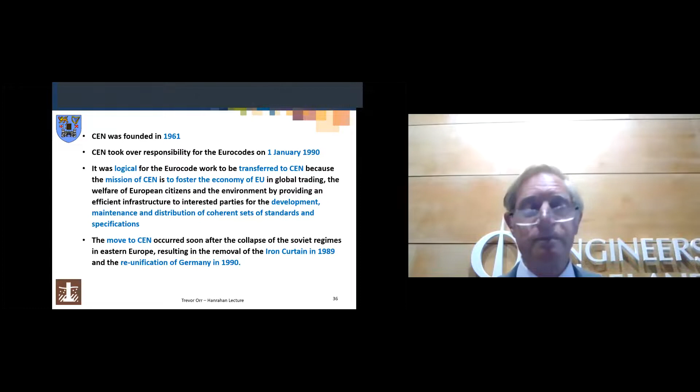An important consequence of the move to CEN has been the involvement of all the CEN member countries, some of which are not members of the EU, and some of which were formerly communist states in the eastern zone of Europe, in the development of Eurocode 7.

CEN now has 34 national members working together to develop European standards, called ENs, in various sectors to build a European internal market for goods and services and to position Europe in the global economy.

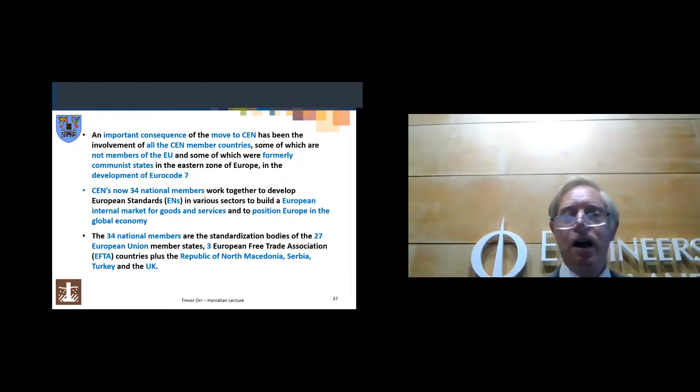The 34 national members are the standardization bodies of the 27 European member states, the 3 European Free Trade Association countries, EFTA, plus the Republic of North Macedonia, Serbia, Turkey, and the UK.

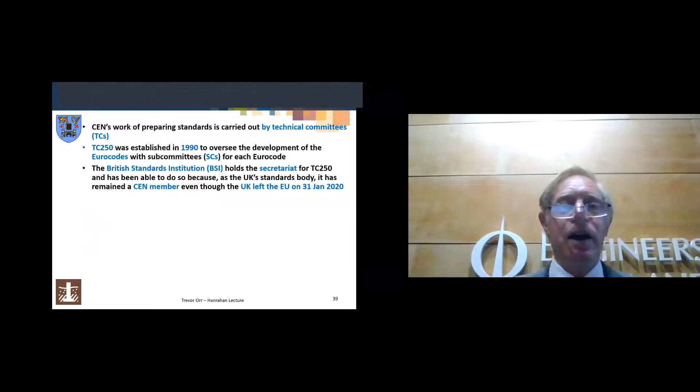CEN's work on preparing standards is carried out by technical committees. TC 250 was established in 1990 to oversee the development of the Eurocodes, with subcommittees, SCs, for each Eurocode. The British Standards Institution holds the secretariat for TC 250, and has been able to do so because the UK standards body has remained a CEN member, even though the UK left the EU on the 31st of January 2020.

Subcommittee SC7 of TC 250 is responsible for Eurocode 7, and it's hosted by the Dutch standards body, NEN. Over the years, SC7 has set up many working groups, task groups, evolution groups, and project teams to prepare, review, and revise Eurocode 7.

These have involved mostly voluntary input from a very large number of geotechnical engineers, from consultants, contractors, research organizations, and academia. Many Irish geotechnical engineers have been involved in these SC7 activities.

Since then, all the Eurocode meetings have been held online. With all the working groups, it would have been impossible to make them face-to-face, so working online has in fact been very necessary and very productive in the 2 years since that meeting.

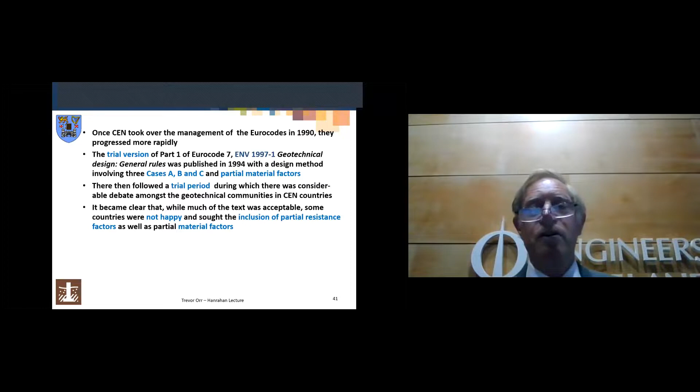The trial version of Part 1, General Rules, was published in 1994 with a design method involving 3 cases, A, B, and C, and partial material factors. There then followed a trial period during which there was considerable debate among the geotechnical communities in the CEN countries. It became clear that while much of the text was acceptable, some countries sought the inclusion of partial resistance factors as well as partial material factors. The EN version was then prepared and included 3 design approaches that allowed the use of partial resistance factors as well as partial material factors. So it moved from the cases to design approaches.

The standard version of Eurocode 7 received a unanimous vote of acceptance by the CEN member bodies in 2004. It was critical to receive a unanimous vote in 2004 as Eurocode 7 Part 1 in order to ensure the new code's success and acceptance by the construction industry as an EN standard throughout Europe.

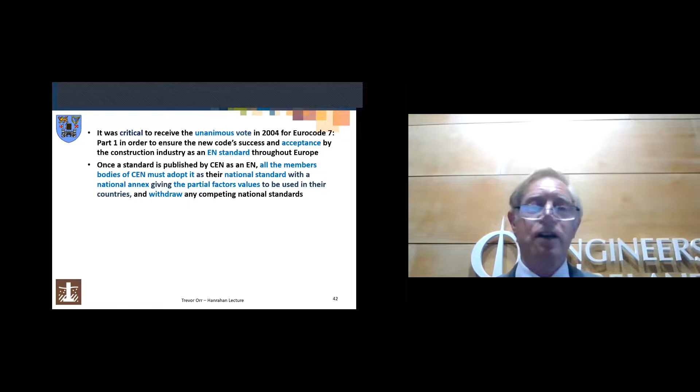Once a standard is published by CEN as an EN, all the members must adopt it as their national standard, with a national annex giving the partial factor values to be used in their countries, and withdraw any competing national standards. Eurocode 7 is published by CEN as an EN, and so the same standard is now used for geotechnical design in all the member countries.

In contrast, standards published by ISO are not mandatory unless they are adopted by CEN and published as EN ISO standards. So if they are published as EN ISO, then they do become mandatory.

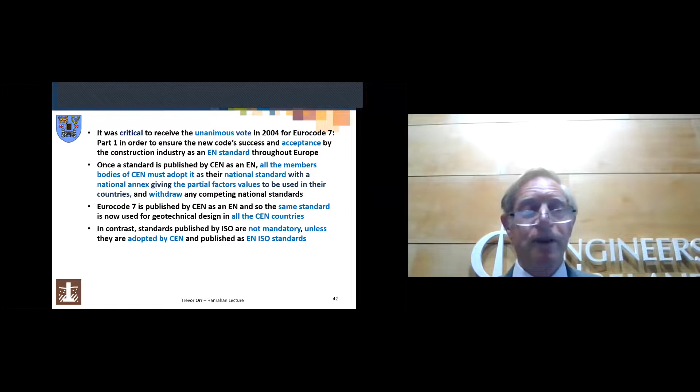In order to avoid duplication of standardization work, it was decided in 1991 under the Vienna Agreement that when CEN and ISO both require a standard in a particular area, they would cooperate and not compete. So there has been collaboration between CEN and ISO in the preparation of various standards to support the Eurocodes.

A very large number of supporting standards for Eurocode 7 have been prepared collaboratively by CEN and ISO committees. CEN TC 341, Geotechnical Investigation and Testing, publishes, for example, EN ISO 22477-4, testing piles, dynamic load testing. I should also include 22477-10, which is the rapid pile load testing.

ISO TC 182 Geotechnics produces standards for the identification and classification of soil, and some supporting standards are being prepared by just CEN with no ISO involvement. So you've got TC 288 with a lot of execution standards for special geotechnical works, and then TC 396 with standards for earthworks.

In 2003, the Commission published Guidance Paper L, listing the intended benefits and opportunities of the Eurocodes as being to provide common design criteria and methods and a common understanding regarding the design of structures, to facilitate the exchange of construction services, marketing and use of structural components and kits, and the marketing and use of materials and construction products.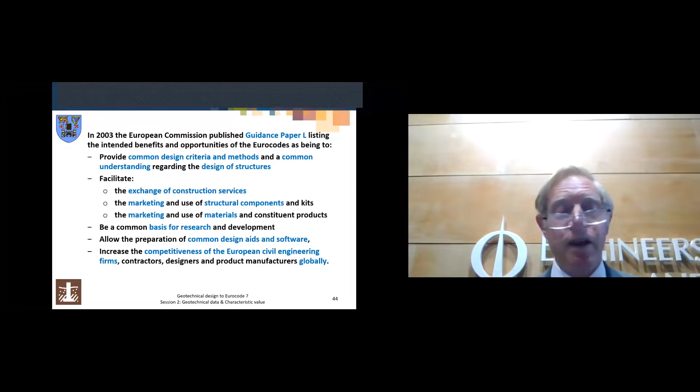They were intended to provide a basis for research and development. They allow for the preparation of common design aids and software, and they increase the competitiveness of European civil engineering firms, contractors, designers, and product manufacturers globally. So those are the benefits of the Eurocodes, as seen in this guidance paper L.

Moving on, let's look at the regulatory background to Eurocodes and Irish standards. In order to further its objective of removing technical barriers to trade in construction products between European Union member countries, the Commission passed the Construction Products Directive in 1988. This sought to ensure free movement of all construction products within the European Union by harmonizing national laws with respect to the essential requirements applicable, particularly health and safety.

The essential requirements to be achieved in the case of structures include that they shall have acceptable mechanical resistance and stability and are safe in use and in case of fire. The Eurocodes serve as a means to prove compliance of building and civil engineering works with the essential requirements of the CPD. So the Eurocodes serve to prove compliance.

The CPD was repealed and replaced by the Construction Products Regulation in 2013. An EC directive is a legal act of the European Union that requires member states to achieve a particular result without dictating the means of achieving that result. Whereas a regulation is an act of the European Union that becomes immediately enforceable as law in all the member states simultaneously. So they have different emphasis, different structure to them.

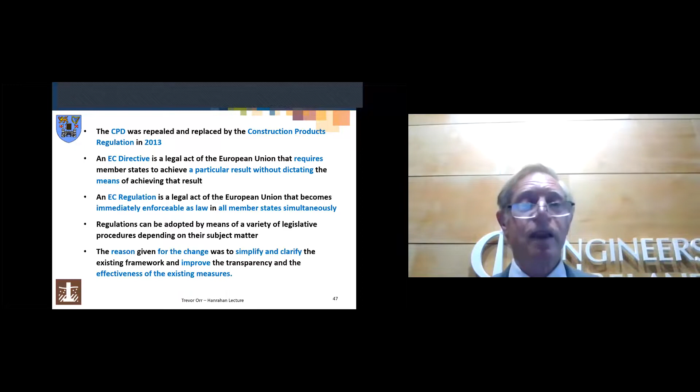In order to implement in Ireland the Construction Products Directive published in 1989, the first Irish building regulations were published in 1991, with the latest update in 2021. The stated aim of the building regulations is to provide for the safety and welfare of people in and about buildings, so it's similar to the bylaws. They apply to the design and construction of new buildings, including a dwelling, or extension to an existing building, and requirements for foundations of buildings.

Since the Eurocodes had not been published in 1991, they are not referred to in the 1991 building regulations or associated technical guidance documents. However, they are referred to in the current 2012 technical guidance document A to the current building regulations, which states the use of the Eurocodes referenced in this document is practical guidance on meeting the requirements of Part A.

When work began on the Eurocodes, Ireland didn't have a dedicated national standards body, as I mentioned at the start of the lecture. To oversee the development of the Eurocodes from an Irish perspective, the National Eurocodes Advisory Committee, NEAC, was established, and the chairman of NEAC until 1994 was Nick Ryan of Ove Arup. Eric Farrell and myself, following our work on Eurocode 7, were invited to be members of the NEAC in 1986, and Eric was then appointed as the Irish representative on the SC7 committee in 1990.

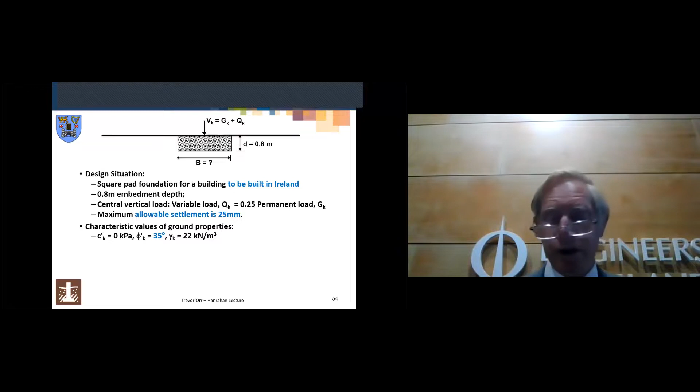Taking a spread foundation, square, with width B, embedment depth D, it's carrying a combination of a permanent load and a variable load, and the central variable load is 0.25 of the permanent load, and the maximum allowable settlement is 25 millimeters. Characteristic values of the ground properties: c of 0, phi 35, and gamma of 22, E value of 20 MPa. We're looking for the foundation width to satisfy both the ULS and the SLS. Using the bearing capacity equation given in Eurocode 7 and the factors that go with the equation, and also the partial factors from the Irish NA for all design approaches, these are the results that were obtained.

So you can see here, those curved graphs are the different bearing capacity equations. The lowest one here is for DA2. The next one up is for DA1, combination 2. The next one, with dots, is for DA3. And the top one is for traditional design with a factor of safety of 3. I've got another line here, the brown line, for foundation design for serviceability, for settlement. Now you'll see that over here, these lines are above the settlement line.

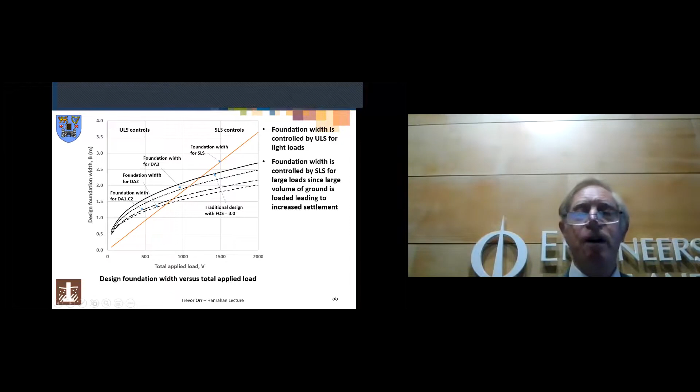So therefore, this is the foundation width. If this is the design requirement for ULS, this is the design requirement for SLS, over here the ULS controls, whereas over here the settlement is higher and the bearing capacity is less, so the SLS controls. So ULS controls over here for foundation widths for lighter loads, and SLS controls over here for larger loads, because a larger volume of ground is loaded, leading to increased settlements.

Now, looking at the divide between the two, you see the change from one situation to the other varies. So that line DA1, over here ULS, over here SLS controls, and the value of that is about just under 900, maybe 850 kilonewtons there. I haven't given any units, must do that.

The next one, a bit lower, is DA2. So the changeover from ULS to SLS occurs at a slightly lower value, and for DA3 it occurs at a higher one. And then for the traditional design, it occurs even higher again, up here. So therefore, traditional factor of safety 3 gives the largest width and hence the least economical design.

So if you're comparing them, the least economical is the traditional design using a factor of safety of 3. If you're using any of the other designs, you're going to have a more economical design, designing to Eurocode 7. So Eurocode 7 has probably brought in more economy into designs, certainly in foundation designs.

Now let's look at the second generation of Eurocode 7. CEN regularly reviews and updates its standards. In 2014-15, a systematic review was carried out of all the Eurocodes, and arising from this review it was decided to prepare a second generation with the following priorities: improved ease of use - they were considered not easy to use, the first set - increased harmonization, since these weren't harmonized enough between each one, a reduction in national parameters, and strengthening of the requirements for robustness.

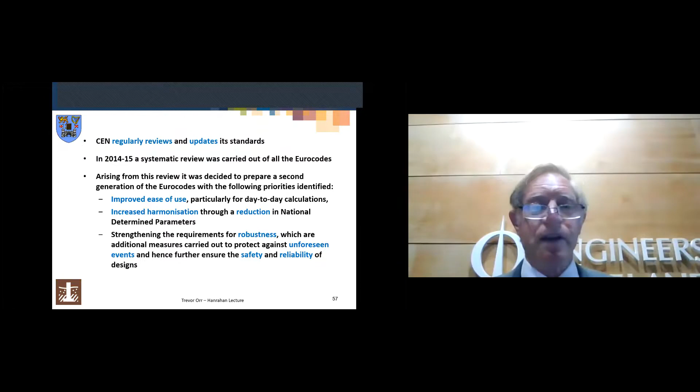Robustness is a requirement which is a sort of buzzword in the Eurocodes. These are additional measures carried out to protect against unforeseen events and hence further ensure the safety and reliability of designs - things over and above what you calculate usually. And we'll look at what some of those measures might be.

Following additional priorities were identified for Eurocode 7: simplifying of the design approaches. What's been done is they've turned it into design cases, being combinations of partial factors, rather than having the design approaches, which was considered complicated, or not very user-friendly, before.

Reorganizing of structure and presentation, so they're now more consistent. So all the Eurocodes are very consistent in the way they're set out and structured.

Better alignment with EN 1990, so there's very close linking to EN 1990. Previously, it wasn't so linked to it - improved reliability discrimination. It wasn't so linked to it because EN 1990 was really set up for structural design, not for geotechnical. But EN 1990 is developed now to be both for structural and geotechnical, and hence it's easier for Eurocode 7 to be linked back to it and made consistent. So that's been a great improvement. And more reliability discrimination, and I'll come to that in a minute.

Improved rules for groundwater pressures, improved rules for common geotechnical structures, and more calculation models are included now, so there's much more calculation and assistance in it. And then improved rules for numerical methods, that's because more analysis is numerical nowadays. And improved rules for design involving rock and dynamic design.

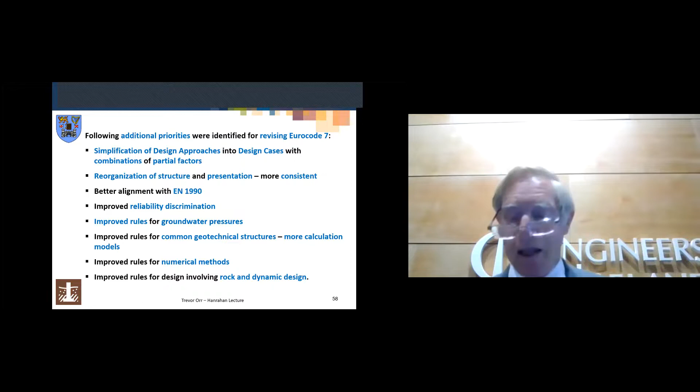Now, reorganization of Eurocode 7 geotechnical design from 2 into 3 parts. So previously we had 2 parts, now we're going to 3 parts. The first one is general rules, and it has various things in it, but the main thing is the reliability differentiation with groundwater pressures, numerical modeling and alignment with EN 1990 as part of this improved Part 1. Part 2 has the concept of the ground model, which is a new thing being brought in.

More focus on derived values and how to get them, with alignment with TC 341 - these are all the testing standards. Part 3 is the actual geotechnical structures which are designed, and the first three parts are more specific, like parameters and definitions.

You've got sections 4, 5, 6, 7, and 8: slopes, spread foundations, pile foundations, retaining structures and anchors, similar to the existing Eurocode 7 but expanded and improved. Then 9, 10, 11, and 12 are all new, broadening the Eurocode to cover fill structures, reinforced elements, ground improvement, and groundwater control. Those are new in the second version.

The second generation version of Eurocode 7 has 34 references to reliability, whereas the existing Eurocode 7 has just 5. So there's been a great movement towards reliability.

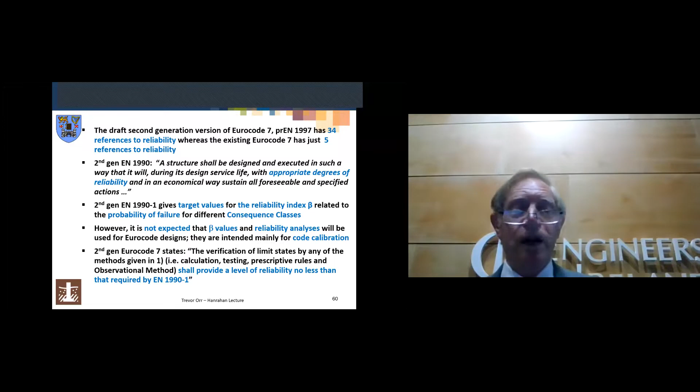Eurocode 7 says that verification of limit states by any of the methods given - calculation, testing, prescriptive rules, and observational method - shall provide a level of reliability no less than that required by EN 1990-1. It further says that if you design according to Eurocode 7, 1997, you will achieve the reliability required in EN 1990-1.

Reliability differentiation is defined in 1990 as measures intended for the socio-economic optimization of the resources used to execute construction works, taking into account all the expected consequences of failure and the cost of construction works.

It requires structures to be classified into geotechnical categories that combine complexity of the ground and ground structure interaction - the Geotechnical Complexity Class, GCC - with the consequence of failure, the consequence class. Currently classification into a geotechnical category is optional, but in the second generation it won't be optional because it'll be a requirement through this reliability differentiation.

Eurocode 7 states that geotechnical categories shall be used to specify the extent and amount of measures to ensure the appropriate reliability is achieved.

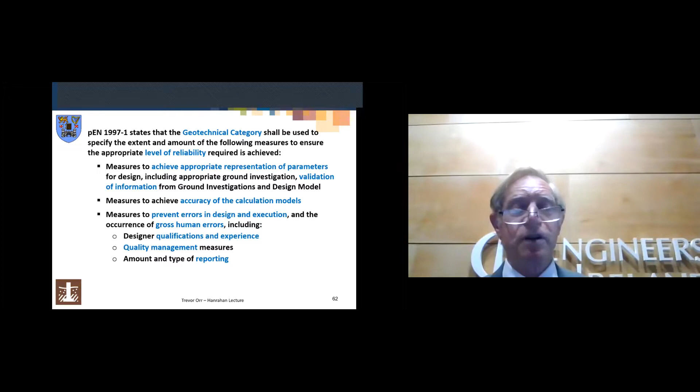These include measures to achieve appropriate representation of parameters for design and validation from ground investigations and design models, measures to achieve accuracy, measures to prevent errors in design and execution and gross human errors, designer qualifications and experience, quality management measures, the amount and type of reporting, and measures to ensure appropriate implementation of design, including supervision, inspection, monitoring, and maintenance. Those are the measures to ensure you get the reliability required.

The assumption of the current Eurocodes in Annex B of 1990 is that personnel responsible for the design of a structure should have appropriate qualifications and experience. However, it doesn't state what constitutes appropriate qualifications and experience - that has to be determined nationally.

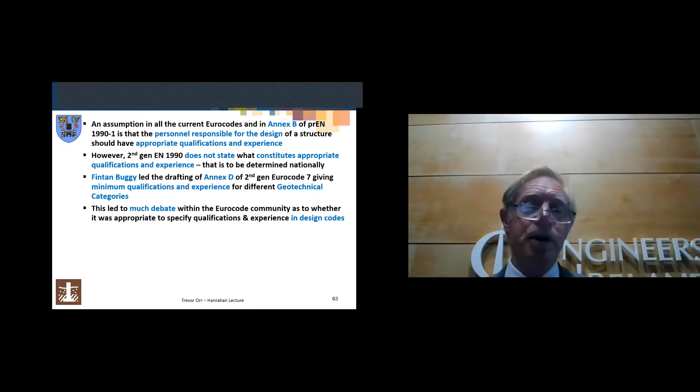Fintan Buggy, mentioned earlier, led a drafting of Annex D for Eurocode 7, giving minimum qualifications and experience for different geotechnical categories. This led to much debate within the Eurocode community as to whether it was appropriate to specify qualifications and experience in design codes.

Following a vote by the CEN members last November, it was decided to retain Annex B in 1990, but to reject the inclusion of specific requirements in Annex D of Eurocode 7 and other Eurocodes when the second generation comes along. So at present, the Geotechnical Society of Ireland and Engineers Ireland support geotechnical engineers applying to register their qualifications and experience with the UK-based ROGEP, Register of Ground Engineering Professionals, which Carl mentioned earlier in the roadmap.

The key dates - this will probably be interesting to people - key dates for the preparation and issue of the second generation of Eurocode 7 are as follows. Between October 2020 and January 2023, SC7 task groups have been set up to review the documents, prepare design examples to test the code and its ease of use, and to prepare guideline documents.

In November 2021, the latest draft documents of parts 1, 2, and 3 were issued. I think since then a more recent draft has been issued, but it's a moving target.

September 2022 to December 2022, the PRENs will be issued - that's an inquiry period, and they'll be available for public review. As Ken was mentioning to me over the coffee break, that's going to be a very busy period. We'll have to read through the PRENs, decide what we like, what we don't like, and send in our queries. So it's a very short window in which to do that.

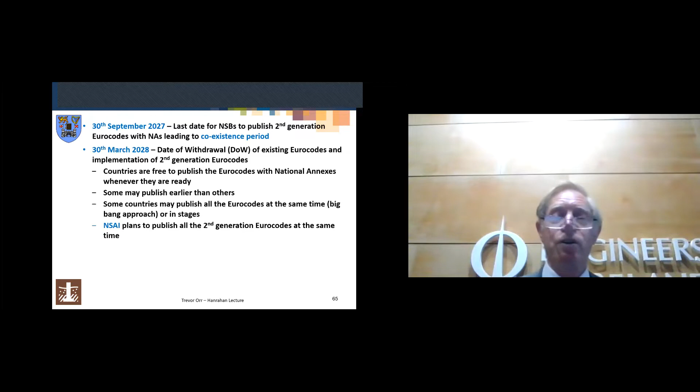Countries are free to publish the Eurocodes with national annexes whenever they're ready. Some may publish earlier than others, and some countries may publish all the Eurocodes at the same time - that's the Big Bang approach. NSAI will publish all the second generation Eurocodes at the same time. There'll be a coexisting period when either version may be used.

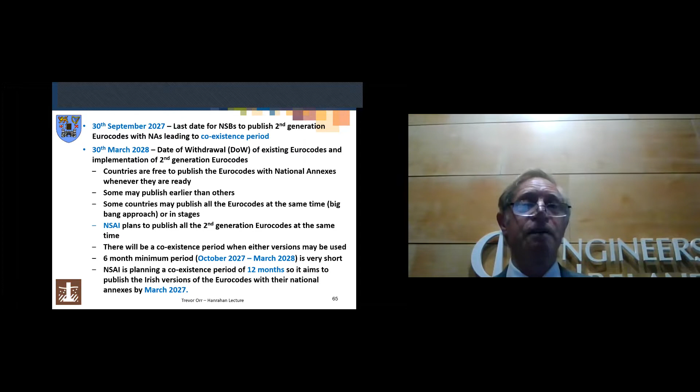Now, the 6-month period, which is the minimum given, October 2027 to March 2028, is very short. So NSAI is planning a coexistence period of 12 months. It aims to publish the Irish versions of the Eurocodes with their national annexes by March 2027, so it'll be 6 months ahead of the minimum last date for publishing. That's the deadline. So I'll finish up now with a few conclusions.

How has geotechnical design in Ireland and Europe advanced with Eurocode 7? Well, I started off looking at the situation before Eurocode 7. There were no standards, no Irish standards, no dedicated national standards body here. British codes of practice were used, separate codes for different geotechnical structures, no consistency between structural and geotechnical design codes, and only bylaws in 3 urban areas with regulations for geotechnical design.

And the European countries all had their own standards based on national practices and ground conditions. So the situation regarding geotechnical design now in Ireland, since Eurocode 7, is that it's been harmonized with all CEN countries using the same code for geotechnical design, published as their national standards.

Geotechnical design has been harmonized with structural design through the adoption of a common design language in the limit state design method and consistent safety requirements and partial factors. Eurocode 7 provides a single code for all the different types of geotechnical structures rather than separate codes for each geotechnical structure as formerly. And Eurocode 7 is supported by a large number of standards for ground investigation, testing, and execution of geotechnical work.

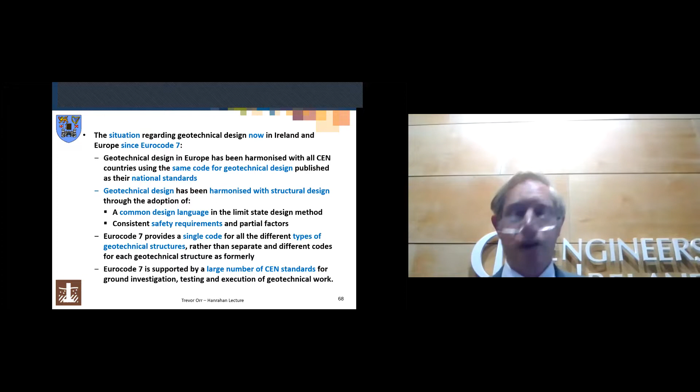Other advances and benefits of Eurocode 7: it provides a definition for the value of a geotechnical parameter to be selected for use in design, and that's a novel feature. It's a flexible code, going back to what Professor Nash said at the start, allowing a materials or resistance factor approach within the limit state design framework.

It uses geotechnical categories to specify the following measures to ensure the required level of reliability is achieved: appropriate parameters, accuracy in your calculation models - maybe model factors from pile design should be giving you the correct calculation models. Errors in design and execution are hopefully prevented, and you've got appropriate implementation through these measures.

It's accommodating scientific advances in numerical analysis, reinforced fill structures, and ground improvement. It has brought together a large number of geotechnical engineers from across Europe in the development of Eurocode 7, and it's facilitated Irish geotechnical engineers to work in Europe, and European engineers to work in Ireland. So on that, thank you for your attention.